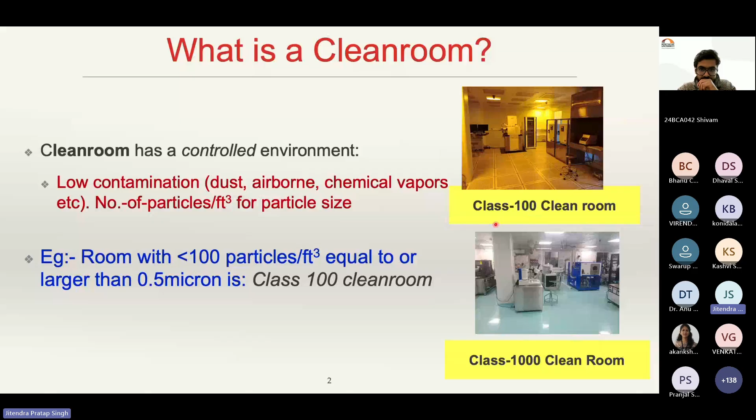So in this slide, I'm showing the classification of the clean room. The different classes are defined from class 1 to 10,000 and more. In this column, the definition is such that taking 0.5 micron size bigger particles, if they are less than 100 particles, we say it's a class 100. There is an ISO standard also—sometimes people say it is ISO 5 or ISO 6. So this is the classification of the clean room.

Now, what facilities normally in the clean room we can see, where we talk about semiconductor device fabrication. One facility is electron beam lithography, where you can use this lithography for devices which are up to 10 nanometer or of the order of 10 nanometer or so.

Or there are other devices like PECVD, plasma enhanced CVD, or reactive ion etching—these are technologies—or E-beam evaporator for metallization, or sputtering, also for contact deposition. There are mask aligners, and other facilities like oxidation furnace for making a uniform oxide layer with controlled thickness, atomic layer deposition, or thermal evaporator. Atomic layer deposition means sometimes we need a very thin layer, like a monolayer deposition, so then we talk about atomic layer deposition.

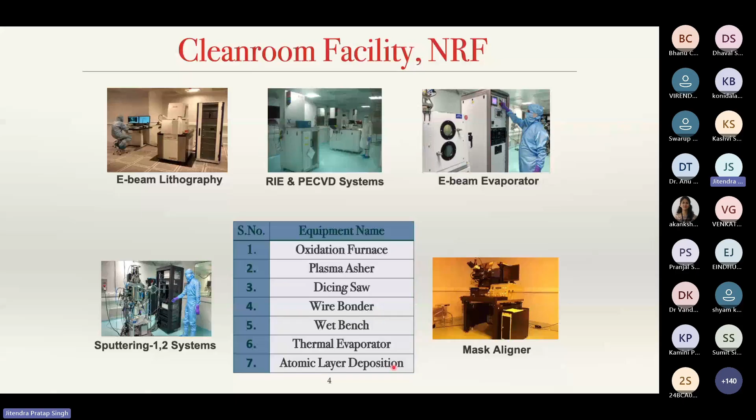Now, first of all, let's talk about in the clean room what are the sources of contaminants. There are many sources of contaminants, mainly three. First is molecular contaminants. This means contamination can come from outgassing—if there is some paint, or some chemicals, there might be vapors coming out.

Or materials can have gases coming out—desorption of gases from the material—and those gases can be a contaminant for the clean room where you fabricate your device. Or there might be oil vapors if you are using various pumps, like rotary, diaphragm rotary pumps—those oil vapors can also be a source of contamination.

When we talk about it, we only allow less than 100 particles per cubic feet—it's a very small number. So this small amount of contamination can also basically disturb the devices.

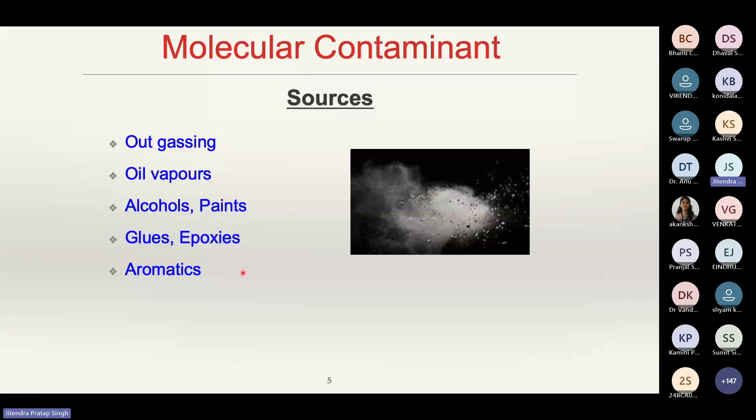There are also glues, epoxies which are used, and aromatic compounds—many sources of contaminants which are molecular in nature. There might also be surface contamination, like here at a workstation or workbench inside a glove box where you fabricate the device in a controlled environment, but the workbench itself can get contaminated.

One of the major contaminations is basically fingerprints, because our hands have oil secretion—oil and grease that comes out from the body, and that is very sticky. Once it is there, it's very difficult to remove because it is a source of molecular contamination. Skin oil, hand cream, face cream, polish—all of these can be sources of contamination inside the clean room.

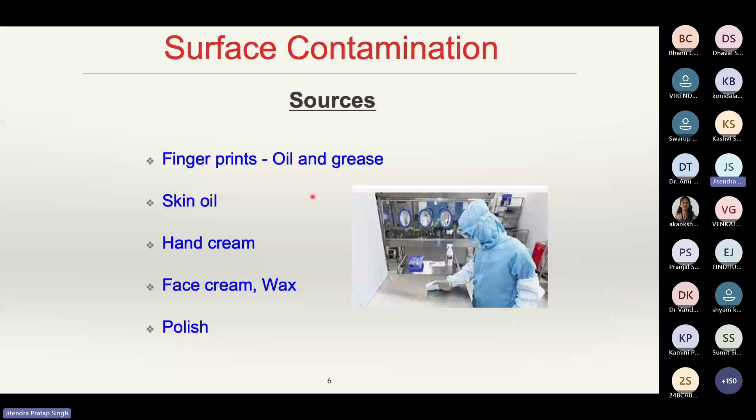The other source of contaminants, which is basically the most important contaminant, is the person himself—the people who are actually working inside the clean room.

So you see we also shed a lot of particles. We don't care in a normal environment, but when you're talking about class 100 or class 10 environments, where we can only allow less than 10 particles per cubic feet, or less than 100 particles per cubic feet, this is very important because there are a lot of contaminants from the person itself, like skin, hair, clothing, lint. Those are also kinds of contaminants. There are also some particle-shedding materials, like cardboard boxes and paper.

Even when we use normal paper, it can also be a source of contamination. So inside the clean room, we take care of all these things, even paper, pens, whatever we bring in. They are different, not the regular conventional things we can bring inside the clean room, because that can also be a source of contaminants. They can shed particulates into the air.

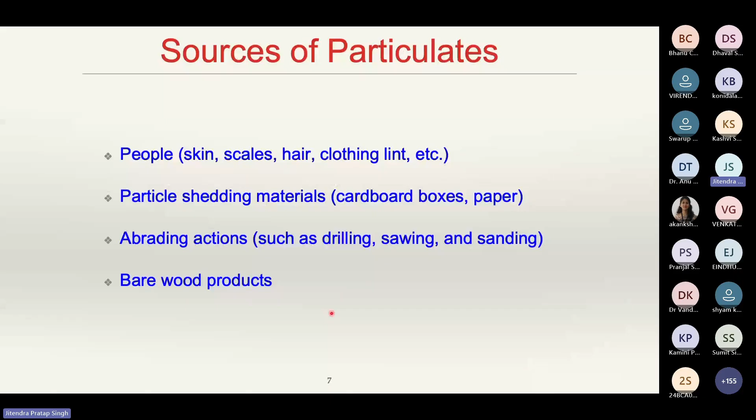And there might be some abrading action. Normally we avoid things like drilling, sanding, sawing, or bare wood products. So normally we use all-metal systems inside the clean room, because bare wood products can also be a source of contaminants. They can also release contaminating particulates into the air.

Now let me talk about what it means by particles more than 0.5 micron, since that was in the definition. You can see here, the black circle represents human hair. You can see the size of human hair.

The human hair size is about 100 microns, and this small red dot is on the same scale, about 0.5 micron thickness. Normally anything more than 50 micron is visible to the eye, and this 0.5 micron size is much smaller than that — more than 100 times smaller. So these particulates are very small; they cannot be seen by the naked eye.

So that's why it's very difficult to control those things. Most of these particles are too small, and mostly they bond with surfaces through electrostatic bonding. They get charged, and because of dipole interaction, they get attached to surfaces. So this is something like the size I'm talking about when I say particles more than 0.5 microns — what does that mean if we compare it with human hair?

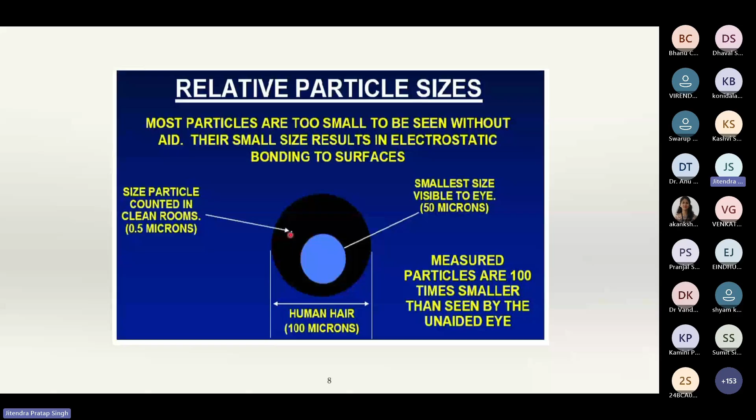So when we talk about particles, we only allow less than 100 particles more than 0.5 micron in size. This picture gives you a relative idea of the size we're talking about. When we talk about 0.5 micron or less, we cannot see it with a normal optical microscope — it has to be through a scanning electron microscope or other microscopy techniques to even see those things.

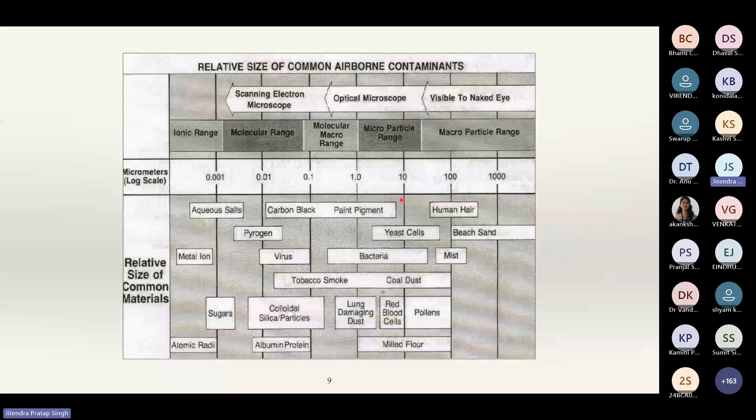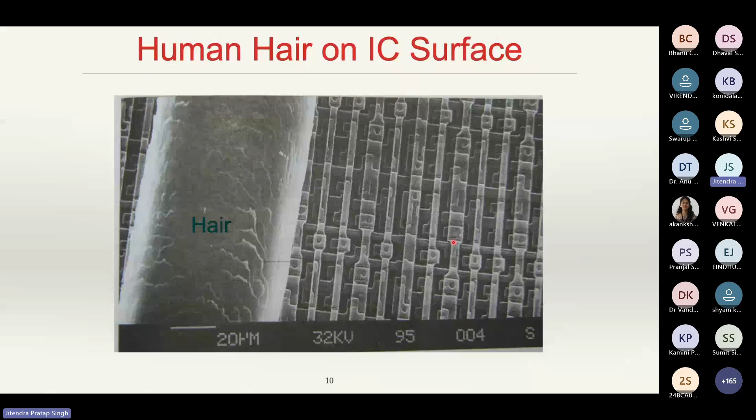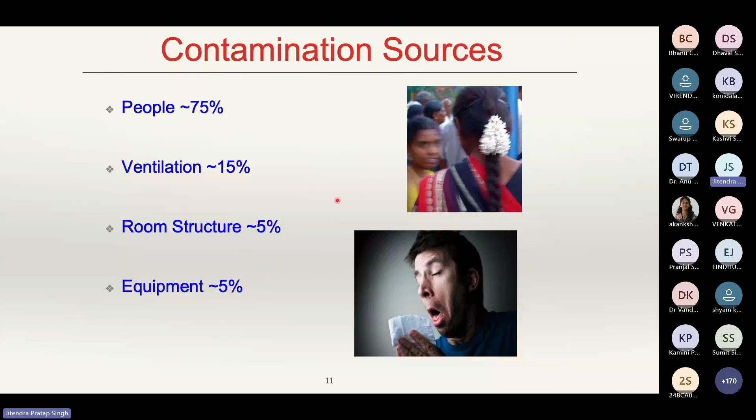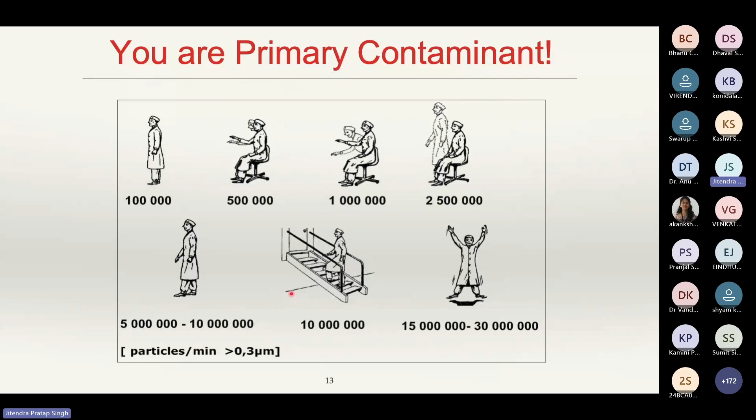So when you go inside the clean room, you have to properly dress up, as you can see people dressed up inside. We also limit the time spent inside the clean room, only going in when needed. That's why every clean room has an entry and exit log, and we also monitor people's activity inside.

So that gives you an idea about the clean room, what it means, and what type of activities one can normally do inside it. Let me give you one more idea.

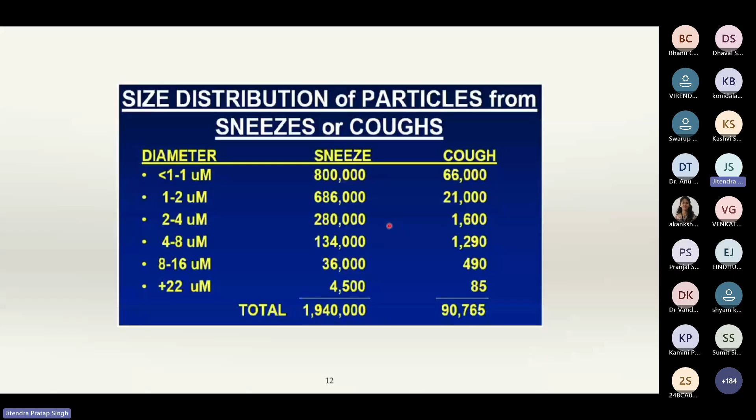One time sneezing gives about 800,000 particles coming out, compared to coughing which gives about 66,000. That's why we use a double layer mask inside the clean room, because the number of particles coming out from sneezing or coughing is very high. So this gives you an idea that when working inside the clean room, it's important to wear all the suits properly and in the correct manner, so that you really cover all of your body parts while going inside.

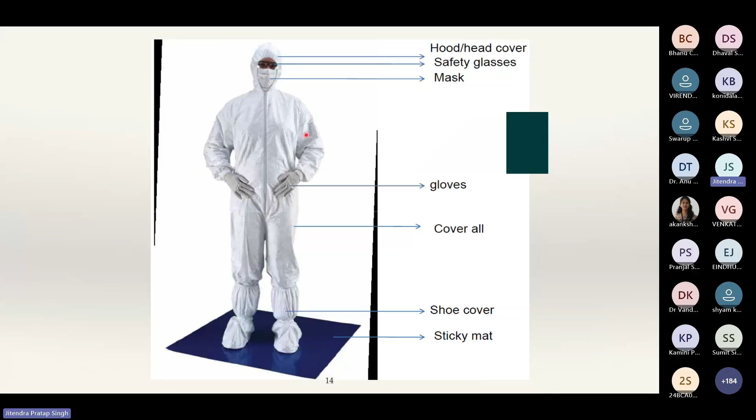Now I'll talk about the facilities inside the clean room. Here I'll discuss some lithography techniques we use inside the clean room. Nowadays we fabricate nanostructures like transistors or nano devices inside the clean room. For lithography, there are two approaches to form nano devices: one is the top-down approach, and the other is the bottom-up approach.

Top-down approach means basically we just use the lithography method. We just use the patterning and then make the devices there.

Bottom-up approach means it uses techniques like CVD, plasma enhanced CVD, or physical vapor deposition. These kinds of methods we use for the bottom-up approach.

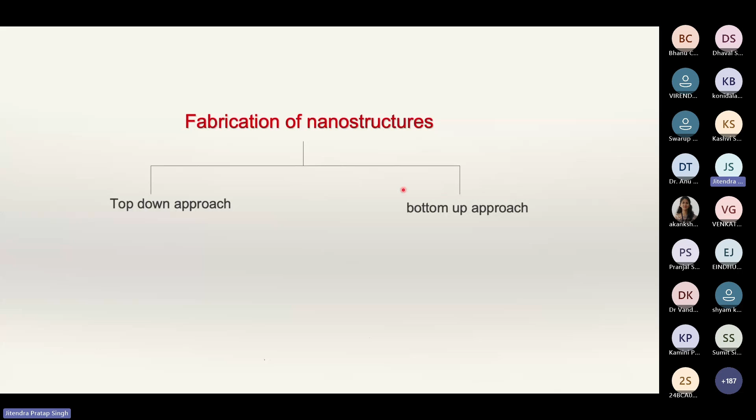So the lithography process is basically your top-down approach. What happens inside the lithography process? We create the nano devices by making some pattern on the substrate. How do we make the pattern? These patterns were made by creation of some kind of resist on the substrate.

I'll show you in the next slide. So we use a substrate here, then we just coat the substrate with a resist. I'll talk about what the resist is after this slide. And then we put a mask here.

Mask is a physical mask, sometimes fabricated by other techniques, like this can be a steel mask, and then this whole structure is basically irradiated.

This irradiation is done by different kinds of methods. One can use basically the visible light, ultraviolet, X-ray, electron, or ion. These are the radiation sources which are actually impingent on the photoresist material.

This photoresist material is nothing but some kind of polymer, or sometimes it is a metal oxide. This polymer's property is such that when it undergoes some kind of irradiation, it is actually chemically changed.

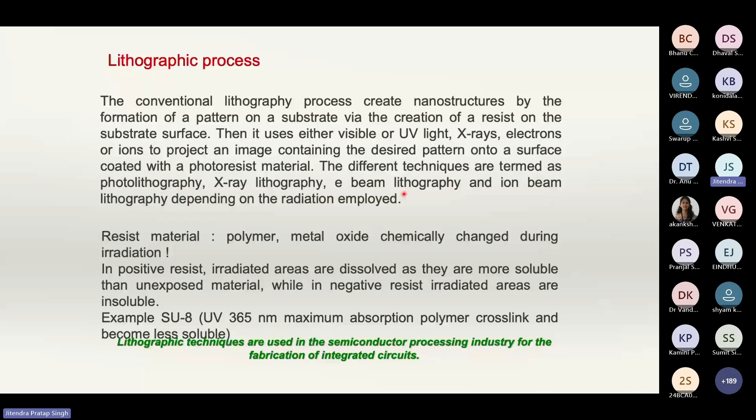Now there are other techniques. This is the general idea about lithography. Then there's another technique, past like two decades or more, which is actually in the market, which we call nano imprint technology. Nano imprint technology is basically where we don't use any kind of photoresist with irradiation, it's a kind of stamp or mold we use, and then you directly put it on the substrate and press it, like in this way.

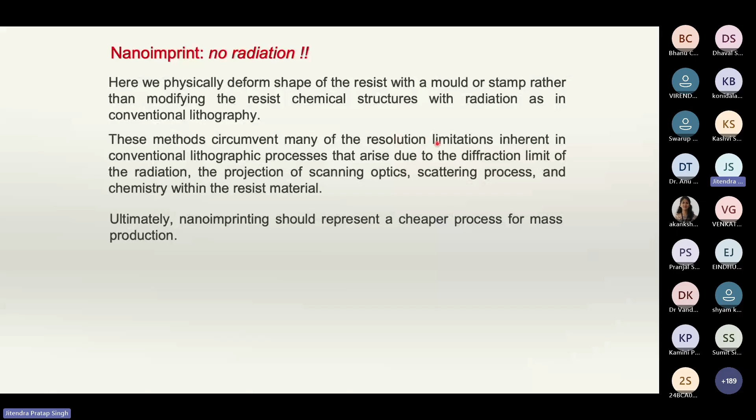So you have a mold here, we have a resist here. Without using any kind of irradiation, whatever is the mold, you can get a negative imprint on the resist just by pressing the mold against the substrate where we have the resist. So you can get a pattern here.

But this technique looks very simple, but it is mainly for polymer kind of structures. If you want to fabricate those, these are more useful. But for devices you want to fabricate on silicon, it's not that much useful for the semiconductor material.

But there's another technique also, like we have in our lab, maskless photolithography. Maskless means we don't use any kind of mask here, because remember when we talk about the lithography process, I told you we first coat with resist and then put some physical mask here. This is a very big limitation, because depending on the shape of the mask, you only get the pattern on the substrate.

So if you have a square mask, or a triangular mask, or circular mask, and if I want to change the size of the window, then we have to fabricate those kinds of hard masks, like steel hard masks, with different techniques, which is very tricky. So one technique which allows where we don't use the physical mask, which is direct lithography, is the maskless lithography.

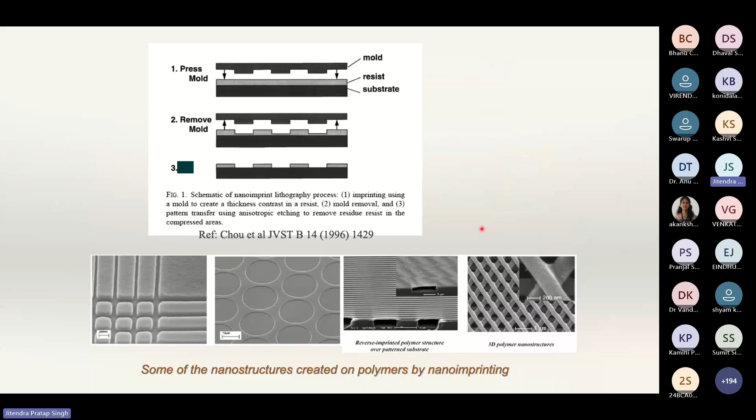There are many tiny mirror systems, which either allow the laser to fall on the substrate, or there are mirrors which can take away light from the resist itself. So we just control the light on and off over the surface, over the resist surface. Instead of a mask, we physically use the mirror system in the machine, such that the light will fall on the surface, or it won't fall on the surface.

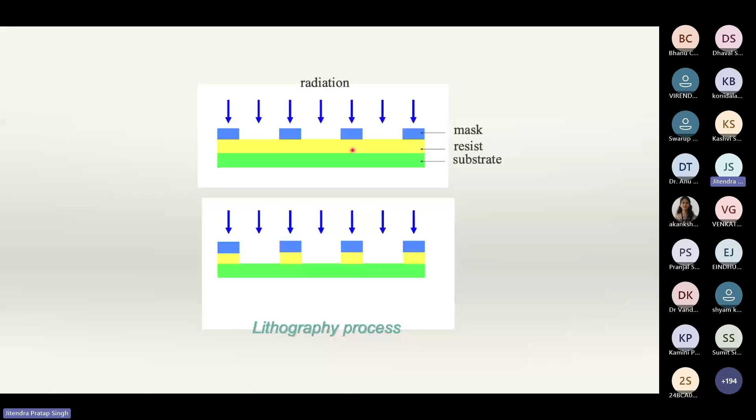So this we control very accurately by using some kind of digital mask, which controls the position of the laser falling on the resist. So it's very accurate positioning, and by that we can fabricate the pattern by the maskless method.

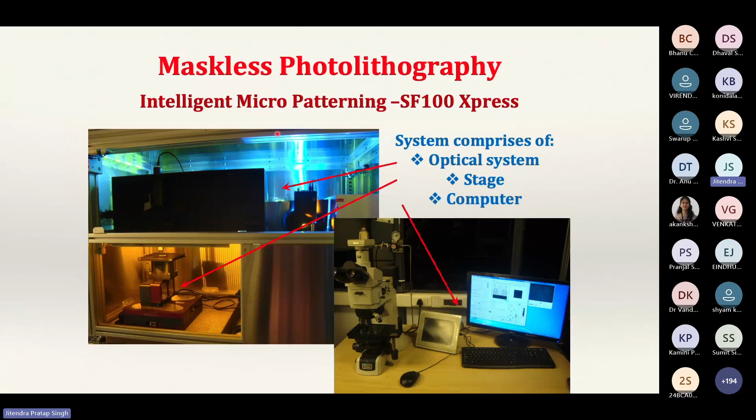And like I showed you, SU8, I talked about that. There's an SU8 series, and you can use either positive photoresist or negative photoresist. So then we don't need any hard mask for patterning.

This is one of the very big advantages here, because fabricating the mask for the pattern is one of the big challenges, because every time you want to change the pattern, you have to change the hard mask itself. And it can go to the full large wafer, like in one go you can fabricate the device pattern over the 6-inch wafer in one go also.

So this technique is well suited for wafer scale fabrication too. Now there's also lithography, which we talked about.

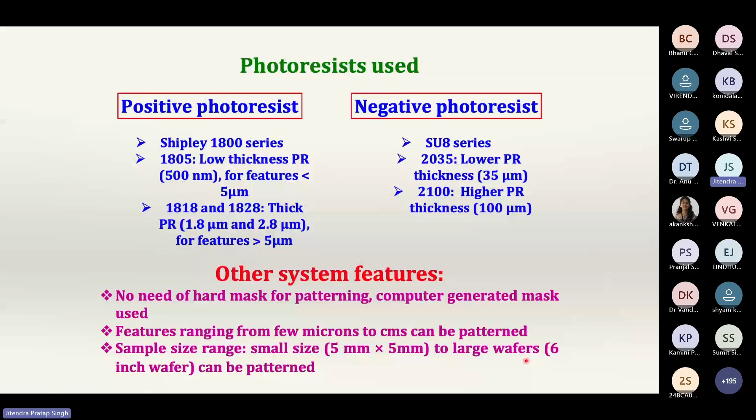That's the technique where we use the top-down approach, starting from the photoresist, and then we fabricate the pattern using different kinds of lithography. You can choose the lithography depending on the resolution you want. If we want nanometer-level resolution, we can use electron beam lithography. If our pattern size is up to a few microns, we can go for photolithography, or we can use ultraviolet UV lithography. So that was the top-down approach.

Then there's the bottom-up approach, which means we fabricate the pattern or structure from atom to atom, attaching one atom to another, and building up the device or pattern that way. That's the idea behind the bottom-up approach.

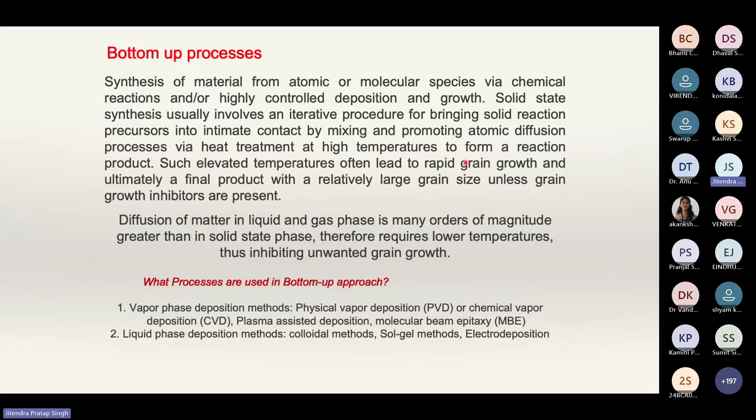One technique we use here is physical vapor deposition. In physical vapor deposition, we convert the solid material into the gaseous phase using some physical process. This can be done either by sublimating the material using electron beam heating, or by using laser ablation, where we shine a laser on the material and it sublimates into the gaseous state.

Or we can use some kind of sputtering, where energized ions get bombarded onto the target material, removing material from the target, which then gets deposited onto the substrate. There are different methods under the class of physical vapor deposition, but in all of them, the deposition happens atom by atom.

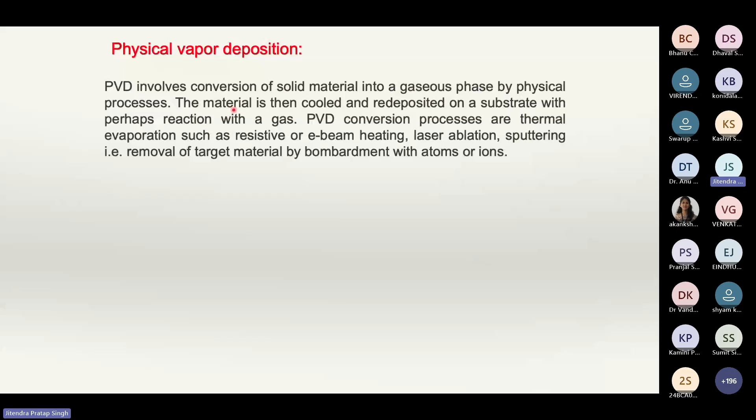One example I'll give you, which we normally use for coating or contact fabrication, is the magnetron sputtering process. In magnetron sputtering, you use the substrate as one electrode, and the other electrode is your target. The target is the material you want to deposit. Suppose I want to deposit chromium, gold, or platinum — that will be my target material, say a platinum target.

Then we create a vacuum in between, and we introduce a carrier gas, which we use to create a plasma. Typically we use argon, because argon is inert, so it doesn't react chemically with the target material or leave any chemical residue on the substrate. That's one of its advantages.

Then we apply a high voltage between the anode and the cathode — the anode is the substrate, and the cathode is the target material. We apply a very high voltage between them, and then, at a certain voltage, by optimizing the pressure inside the argon gas...

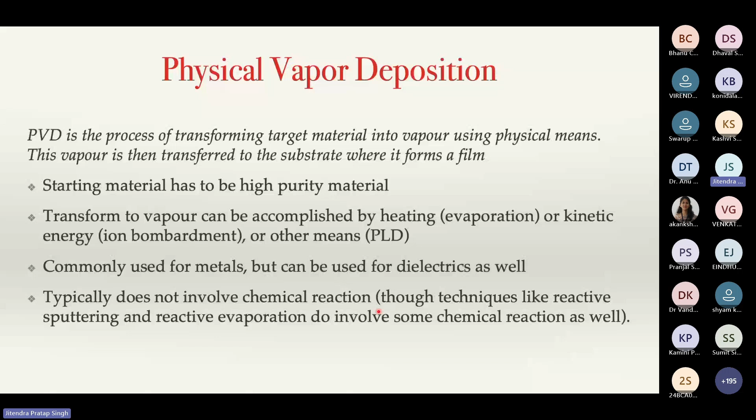But if you go by the sputtering system, because ions are hitting from all places and coming towards the substrate from all directions, they deposit very well. So sputtering is a very useful technique. You get a continuous film on the side wall also. That is one of the advantages here.

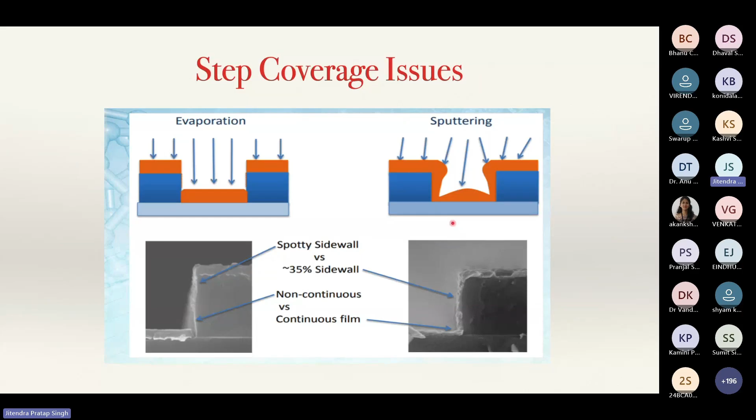Now we talk about a little more physics about how the deposition happens. One can think, can we deposit the film in atmospheric condition, or do we need vacuum? Let's see the reason why we cannot do this kind of deposition in atmospheric condition.

There's a term, mean free path. Mean free path means, between any two successive collisions, what is the length traveled by the molecule. If I talk about air, we mainly have nitrogen, and the gas molecules are moving, so between any two successive collisions, what is the length? If I talk about atmospheric pressure, which is 760 torr, the mean free path is of the order of 40 nanometers. It's a very, very small size, even less than that actually.

So when we have the substrate and the target, this distance is normally a few centimeters, a few tens of centimeters, around 20 centimeters or more than 10 centimeters.

So in this case the mean free path is 40 nanometers. This means you won't get meaningful deposition when you are working at atmospheric pressure. If I reduce the pressure and go for low vacuum, around 0.76 torr, the pressure and mean free path are inversely proportional, so when you go for lower pressure, the mean free path actually increases.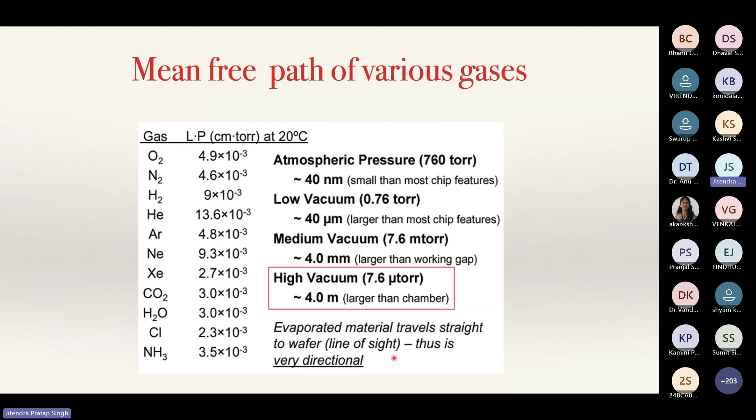Now I'll talk about contamination also. The other reason why we use deposition inside a vacuum chamber is we want very good vacuum. High vacuum is good enough, but normally we go for ultra high vacuum also, like 10 raised to power minus 9 torr. High vacuum is 10 raised to power minus 6, and if you go up to the limit of 10 to power minus 9 or better, we call it ultra high vacuum.

So what happens is, if you have a surface, in air there is always some humidity, and water molecules are present. These water molecules are polar molecules - water has a very high dielectric constant. Because of this polar nature, these water molecules or other contaminants get dipole interaction with surfaces. Even if the surface is not charged, there might be some dipole interaction.

Because of that, most surfaces will always be covered by a very thin layer of water, which we call humidity - there will be some water patches on your surfaces, or contaminants, vapor species, dust, or other gases which you don't want. Oxygen is one such gas - most surfaces get oxidized because oxygen molecules randomly land on the surface. They can react with silicon to form silicon dioxide, or with other materials to cause oxidation, whatever contact you are making can also get oxidized.

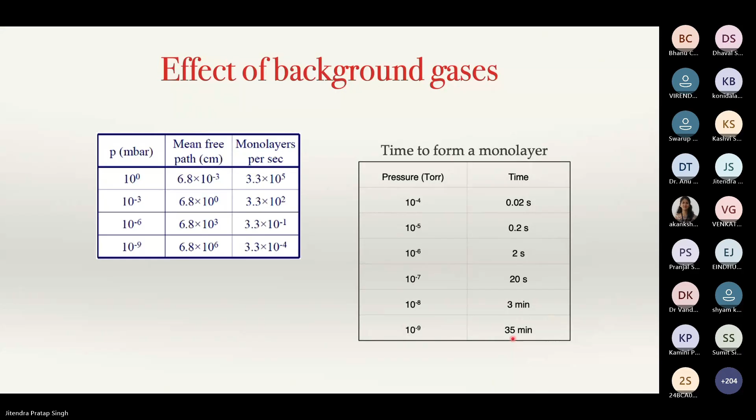Now the other important case: mean free path and pressure are very important parameters when we want to fabricate a device or contacts. The other thing is the arrival ratio. In case of deposition, arrival ratio means how many molecules arrive at a 1 nanometer per second deposition rate relative to the molecular impact of residual gases.

Even if my pressure is 10 raised to power minus 6 torr, whether high vacuum or low vacuum, it doesn't mean there's no other gas. It's still vacuum, but it's still 10 raised to power minus 6. In layman's language, at atmospheric condition, 760 torr or about 1 atmosphere, there are about 10 raised to power 19 molecules per centimeter cube. So this is the molecular number, 10 raised to power 19 molecules.

If you reduce to 10 raised to power minus 6 torr, there are still a huge number of molecules per centimeter cube. The mean free path is big, but there are still chances that the vapor species get hit by residual gas molecules still inside the chamber. So we define some kind of arrival ratio here.

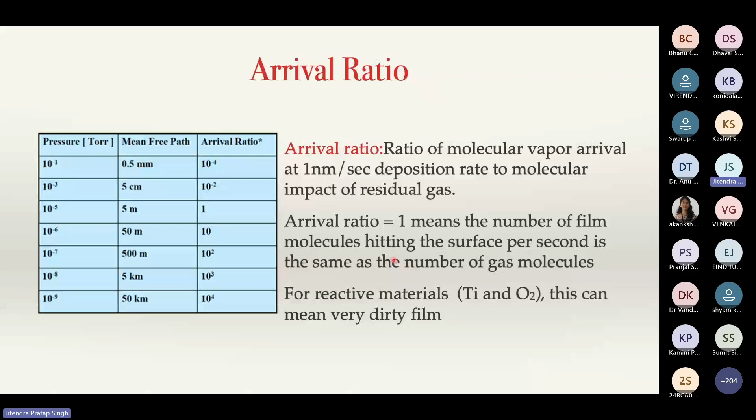Now the other thing is vapor pressure. Suppose we want to deposit some material, and it's changing its state from solid to gas phase if sublimating, or from solid to liquid and liquid to vapor if melting. The vapor pressure is very important, because it will ultimately define how much the deposition rate is.

Normally the vapor pressure depends on your operating pressure, like in a PT diagram. For a given PT diagram, your triple point is fixed. If I reduce my operating pressure, the surface evaporation will take place much more easily. So in the PT diagram, I can change the operating pressure, and that can change my triple point.

You can easily increase the vapor pressure, and easily go from the melt state or solid state to the vapor phase. This can be done by using the Clausius-Clapeyron equation. I'm not going into much detail, but that is the idea.

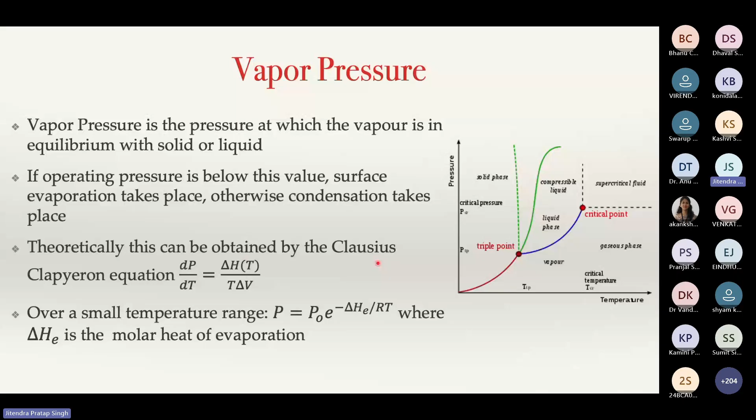This graph shows vapor pressure versus temperature. Vapor pressure is also a function of temperature, so depending on different temperatures, different materials have different vapor pressure. If I want to deposit aluminum, I want to increase its vapor pressure, so this graph gives you the idea of what temperature corresponds to what vapor pressure.

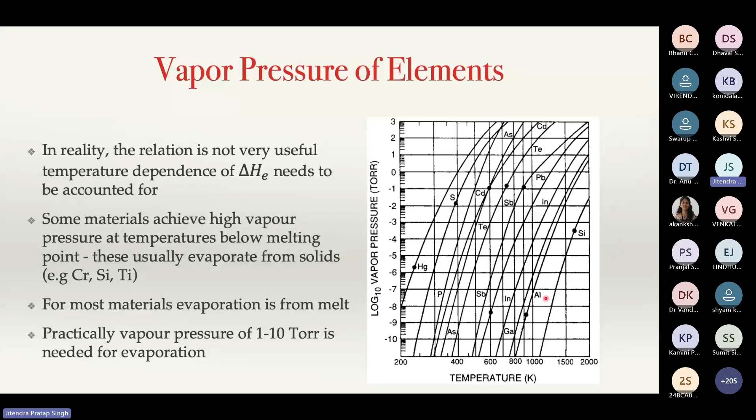So normally we have this kind of experimental graph with us. Then we can use a Knudsen model for evaporation to calculate the mass evaporation rate. This is a function of temperature, a function of the molecular weight of the species, and also the vapor pressure. It's a function of the vapor pressure of the liquid or melt, and you have to subtract the partial pressure of the vapor in the gas. So it's proportional to the vapor pressure of the liquid - more the vapor pressure, the higher the deposition rate.

So we have this kind of model, and for different materials, knowing the vapor pressure-temperature dependence, you can put the vapor pressure value in and obtain - as in this example for aluminum - what the mass evaporation rate is.

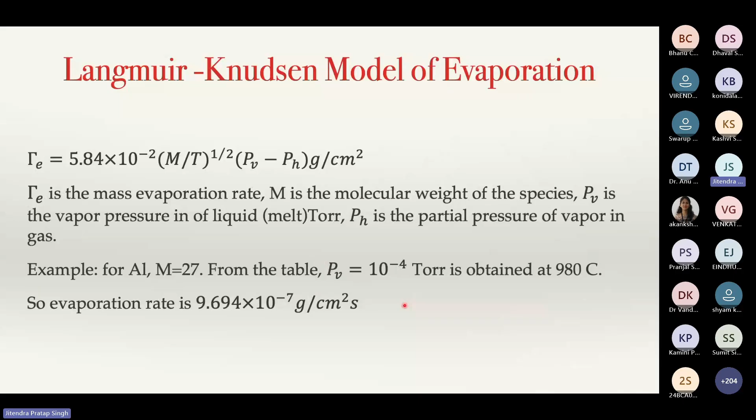Now regarding the deposition rate, there can be two types of sources: a point source or a surface source. Point source means the vapor flux can go in all directions isotropically - like a point source where vapor flux comes out equally in all directions.

We can calculate this by applying a little theory. You can define the area vector, then calculate how much vapor flux is going from there, and calculate the deposition rate - how much deposition rate there is - suppose you have a substrate here.

Now if I have a surface source instead of a point source, you don't have isotropic deposition. The deposition follows a cos theta cos phi kind of function. So there are two types of sources, and depending on the type of source, the deposition rate can be calculated very easily - theoretically we can get some idea of how much the deposition rate is.

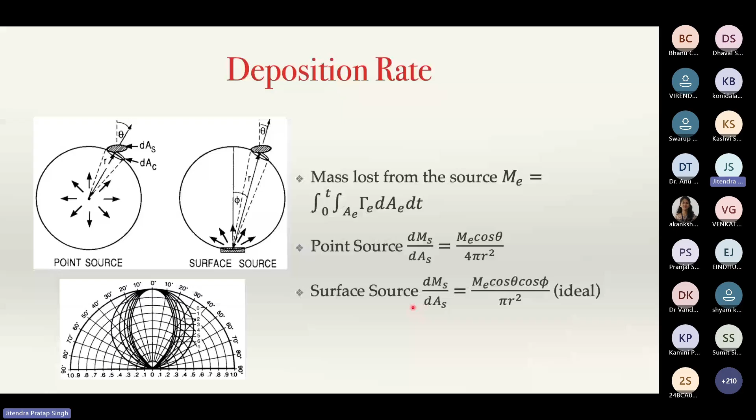Thermal evaporation is a very simple technique where you use a crucible or boat - a high resistive material with a very, very high melting temperature. We pass current through the boat, and since the resistance is very high, it gets heated because of I-squared-R, so the boat gets heated up to a very high temperature.

You can heat up to 1200 to 1300 degrees centigrade, and then we put our material which we want to deposit. This particular boat is made of some special material, so if you want gold, you put the gold wire or gold pellet inside, so that when you heat it, the gold actually gets melted out, and from the gold melt we create gold vapors inside the chamber, which then get deposited there.

One of the properties of the boat material is that it should not interact with your evaporant material. That's why we mostly use boat material which is refractory material, not making any reaction with the gold, like tantalum. We can use tantalum, tungsten - these are the materials normally used, and sometimes graphite boats also people are using.

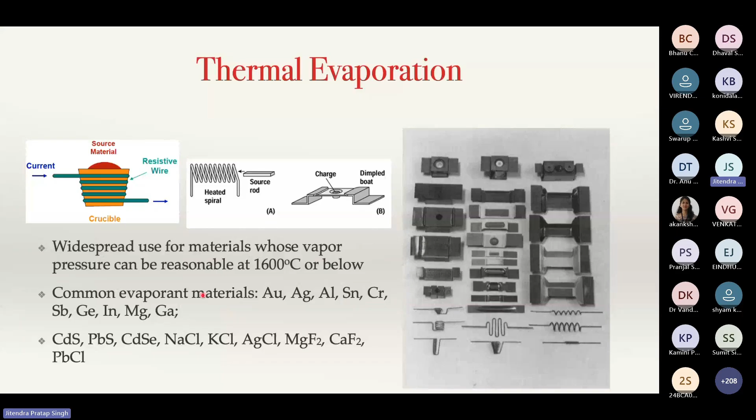The common evaporant materials which we use for thermal evaporation are gold, silver, aluminum, tin, chromium. We normally use these. Let me show you the picture here.

This is one of the evaporators which we have in our clean room. You can see here that these are multiple crucibles. There is a window here, and a shutter which you can put there when you don't want the material to get deposited.

This is my substrate here, which is cooled by water, and there is a thin film measurement setup which we call quartz crystal, by which we measure the thickness of the film also. So what happens is you heat this material inside, it gets evaporated and deposited on the material. When you check the thickness and get the right thickness, you put the shutter and turn off the evaporator.

Now one problem - if I take the case of E-beam instead, I'm not showing the picture, but in E-beam you have a crucible and the electron beam is hitting the surface, not like this whole geometry getting heated up. So the boat is heating up, your material is also getting melted because of that. In E-beam, because the electron beam is very dense, you can shine it and localize it on the surface, so you get localized heating. Your chamber or other material doesn't get heated up, so the contamination issue is less in electron beam deposition.

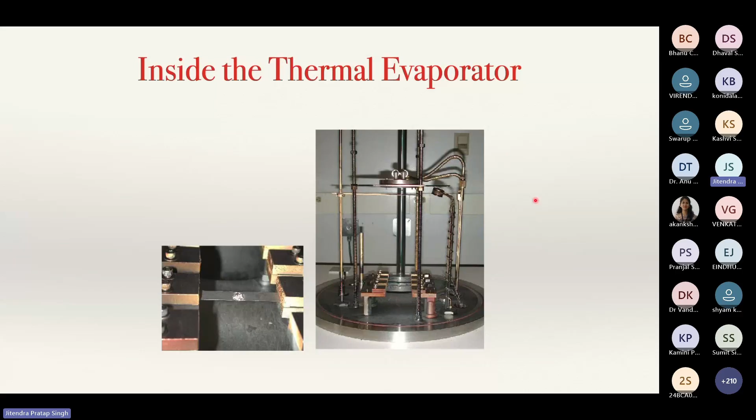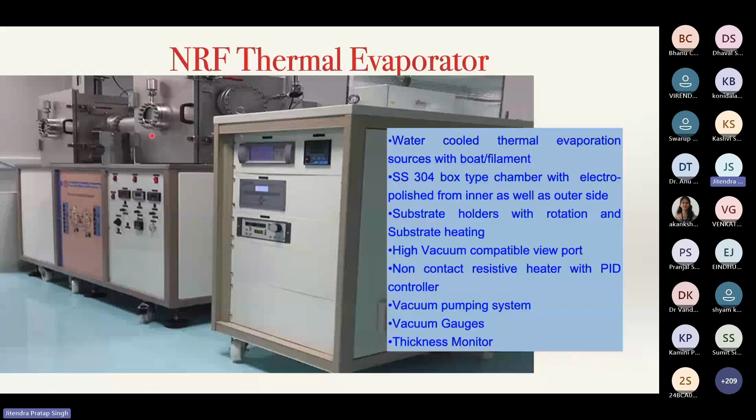So I just end here, and really thanks for your attention. I'll be happy to answer queries if there are any. Yes, thank you.

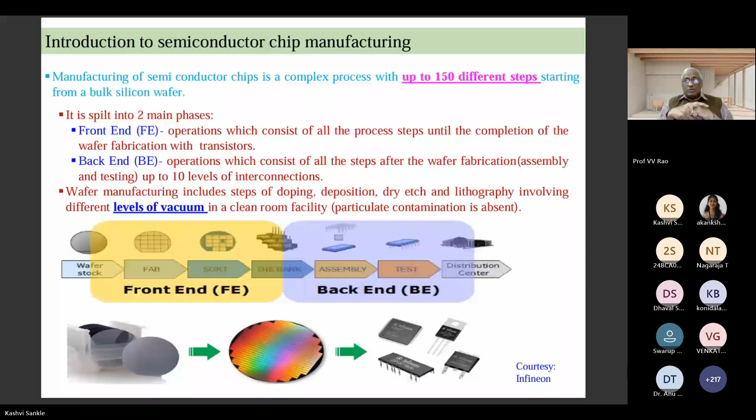And of course, you will have different levels of vacuum for different processes. But what are these various processes I have listed here? If I want to talk about it, each paragraph will take 2 hours, because we teach this subject over a period of 6 months to our BTech and MTech boys in semiconductor manufacturing. So I cannot cover a particular background aspect of vacuum technology in 1.5 hours unless I skip some of these materials research oriented things.

But still, I want to touch upon some of the processes so that you get used to it. This is an interrelated subject. Basically processes like physical vapor deposition, chemical vapor deposition, low pressure plasma deposition, or atomic layer deposition all require high vacuum chambers in which clean, controlled things are going on.

In the earlier talk they introduced the mean free path concept, so I don't have to talk more about it. As you increase the vacuum levels, the distance between two collisions of the ambient molecules keeps increasing. By the time we reach 10 to the power of minus 6 torr, which is nothing compared to the ultra high vacuum required for semiconductor manufacturing, the mean free path is already kilometers, hundreds of meters.

The actual gap between the substrate, our semiconducting thin wafer, and the bottom material, the evaporating semiconducting material, is only 30-40 centimeters in our 1 meter. So naturally, no other interaction takes place except what we want, such as depositing silicon or silicon dioxide or etching. Only those molecules can travel in a straight line path without hitting each other, because the mean free path has been made artificially much longer. So most of them will travel from the source, whether it's thermal evaporation or sputtering.

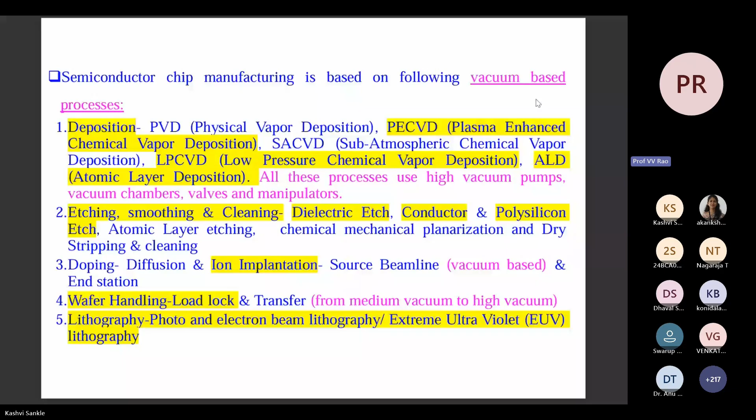The cleanliness can be obtained in a clean room, even at atmospheric pressure, with a lot of money. Or if you put in a vacuum, without much money, you can get the same cleanliness. But you have to use both, because without a clean room, people will not be there to operate, unless there are robots. You cannot make a vacuum room and vacuum chambers and vacuum depositions otherwise. But maybe in the future, after 30, 40 years, there can be vacuum robots. Then you don't require anything, and the requirement of clean room may also go down.

So we'll have to see how the world is going on. Ultra pure gases for deposition, doping, purging, they all have to be done under leak-tight piping everywhere, because if there are leaks, what is a dopant impurity becomes an impurity on metallization. When you are metallizing, making the contacts, that is also a thin film, nanoscale, but that is supposed to be copper or silver. But when you are doping, it is phosphorus or boron.

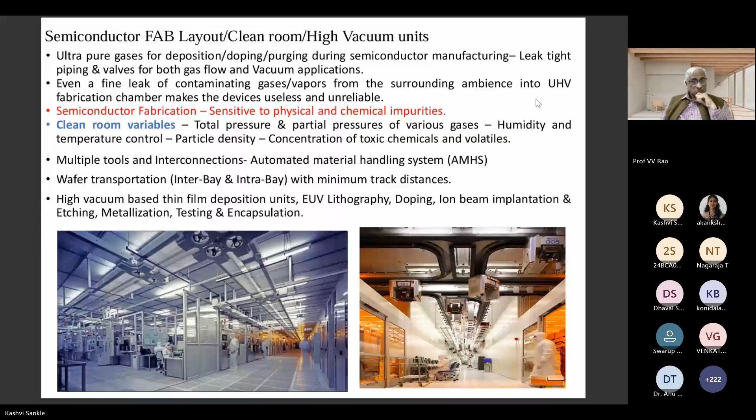This is exactly what others are going to talk about in detail, but I just want you to understand that the central portion, which is very important and repeats, is called lithography with masking etc. There are several other processes linked to this, whether it's implantation or chemical mechanical planarization to smoothen the surface of a deposited layer, or fresh layers of chemical vapor deposition depending on P-type or N-type impurities you are depositing, or metallization like physical vapor deposition of metal films, or etching, so that after lithography you etch and only certain locations get deposited while others don't, so you get PNP transistors and resistors and attached circuits automatically made, giving you nano circuits embedded. Finally, in between, unwanted things are removed by etching, then cleaning, then diffusing the dopants and waiting until you get proper implantation of the impurities.

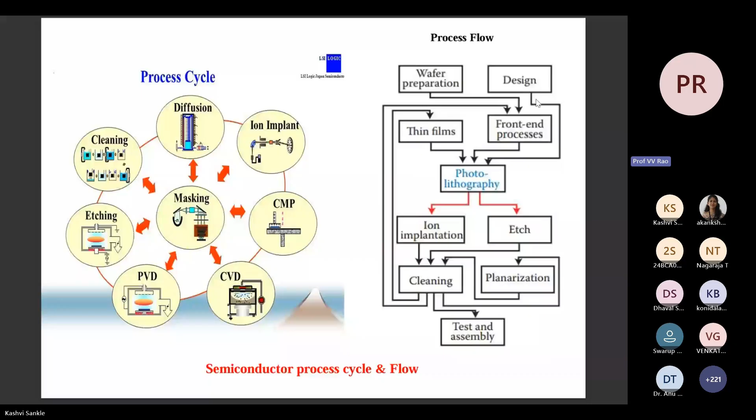So these are basically various processes, it's another way of looking at it. But why I am telling all this is under vacuum. Okay, so already time is up now. Next slide please. So let us go to what all I have been talking about. It's vacuum, what is that, first of all.

Well, according to the Vacuum Society, as I already told you, the vacuum scientific definition is: if a cubic centimeter of any space contains 2.5 into 10 to the power of 19 molecules, 1 crore times are there, and every cubic centimeter, like a die that we are playing, that much volume contains 2.5 into 10 to the power of 19 molecules. We don't see them, and the gap between them is in microns.

And when you want to go to ultra high vacuum, even at 10 power minus 9 torr, you still have millions of molecules. Because from crores and crores, you go to millions and millions, lakhs and lakhs. That's all, it's not that vacuum means perfectly atom free, it's not like that. So vacuum is defined as any given space having a molecular density less than 2.5 into 10 to the power of 19 molecules.

Only after vacuum technology was developed, electrons and protons were discovered, ions were manufactured, discharge tubes were made, and then only semiconductors and electronics came. Electronics, which is the dynamics of electrons, is impossible because you cannot get an electron here if all the atoms are neutral, otherwise we would get shocked.

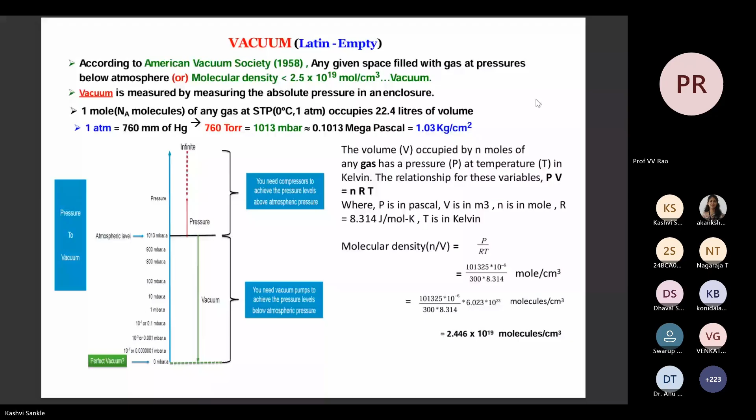There is nothing great I am showing. I am trying to help all of you recollect what you studied in 11th and 12th class. All electrical and electronics is 12th class physics, and mechanical, metallurgy and all those things are 11th class physics. Many times we reproduce the same concepts again with a bit more mathematics and finer details. This is a fact I have seen.

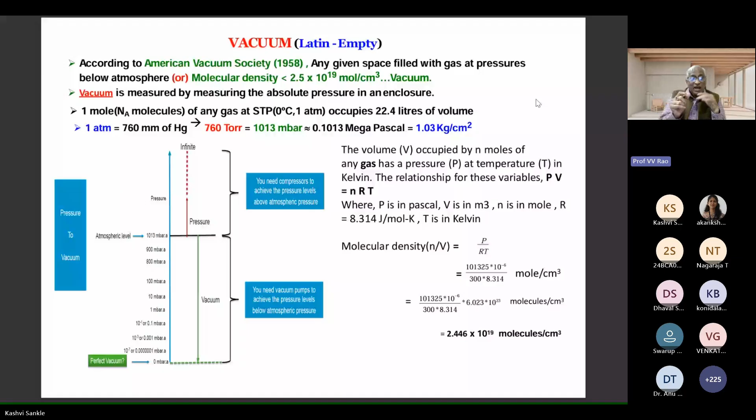So please go through your 11th and 12th class books once again to formulate proper ideas in depth. So here we have explained a few concepts: absolute pressure concept, Boyle's law, ideal gas law validity, number of molecules, 22.4 liters, STP conditions, molecular density, and units of vacuum. These are the points in this slide. Next slide please.

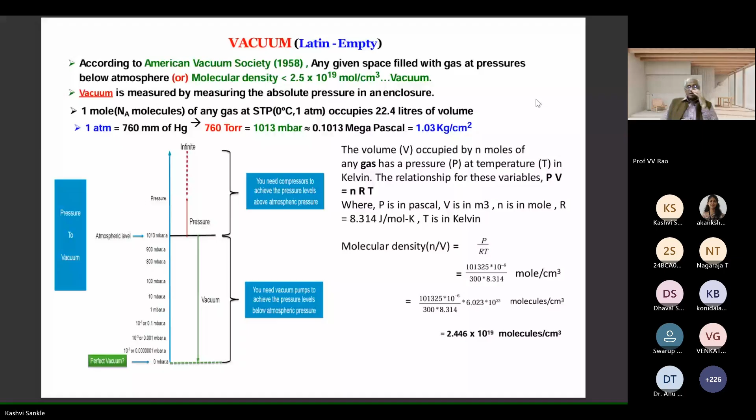This lecture is on vacuum technology, so I have to talk like that. If they had given me a topic of etching or semiconductor layer or packaging, my style would be different. But here it is mostly mechanical, so if you are mostly electronics or electrical students, you may have to understand the mechanical aspect. In fact, the real cost of the equipment is only the hardware. Once you understand all this properly, if you are able to get 10⁻⁷ controls, valves, gates, components properly, it is a child's game, that's all. You can make your own chip industry.

Now, what do you mean by understanding vacuum technology? Like any other technology, it involves production. You have to produce something, whether it is rice, vacuum, high pressure, solid or liquid, anything - that is called production engineering. Then what you produce, you must measure, so measurement is very important. Based on precision manufacturing and measurement, you design something, either a circuit in electronics or a robot or something. That is called design, based on mathematical principles, physical principles, chemicals required, materials required, and space technology.

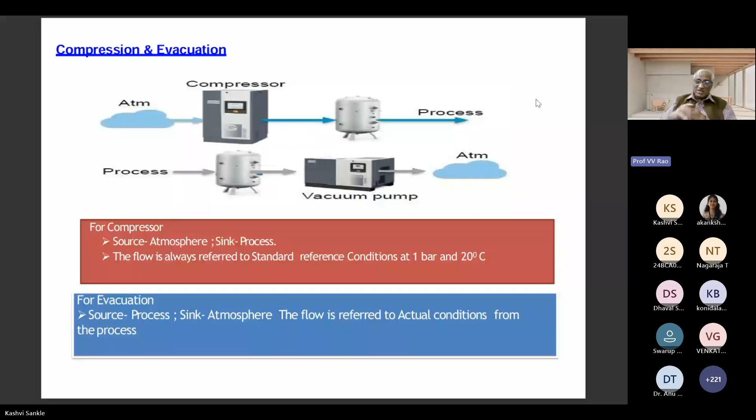So a typical system will look like this. How much time do I have? Because I am almost in the middle. Depending on that, I'll go through.

Anyway, those people who may not be directly interested in these things, they need not worry. But if you are interested in semiconductor manufacturing, which is the focal theme of this conference, you have to know the vacuum technology, because without producing vacuum, the game will not start. So it is very important, not only in understanding typical vacuum systems, you should also understand troubleshooting of those vacuum systems.

Otherwise, you will not be employed. If you only purchase and then operate, they are called operators, not engineers. Engineers should be able to repair it, design it, optimize it, minimize the cost, maximize the throughput, that means the amount of output that is coming. That's where the intelligence lies. That's where you have to use your math, physics, chemistry, material science, computer programming, and management skills.

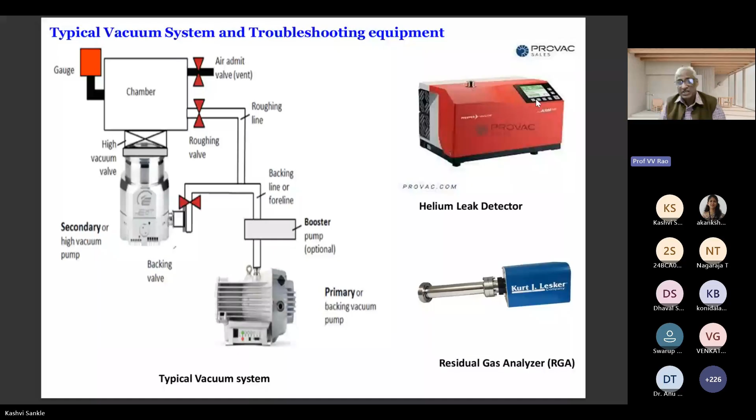So we have understood the units of vacuum. We have understood the need of vacuum for deposition, and because of long mean free path. And another thing which my predecessor has already explained, so I was lucky.

If you try to do anything at 10 power minus 2 torr, within a few milliseconds one layer is formed. An impurity foreign layer is formed before you make the one layer which is to be lithographed to make a PN junction. Already one oxide layer has been formed - that's called monolayer formation, and it takes few milliseconds. Your experimental time is few hours before you close it, package it, and put it into the chip. So during that time, the monolayer formation should take 10 hours instead - only the intentional layers, what you want to make, should be the layers. Okay, this is also important.

So the concepts called molecular density, mean free path, and time to form a monolayer - these things vary with the level of vacuum. And you can imagine, those who are interested - let's talk about mean free path.

As pressure goes down, what will happen to mean free path? Can anybody tell - will it go down or go up? There are only two options. As the pressure is going down and vacuum levels are improving, the mean free path will increase, obviously, because the number of molecules occupying the same closed chamber is less now. Most of the molecules have been removed, so they have more mean free path before colliding. Mean free path is defined not by collision with the body of the chamber - it is defined with respect to their own collisions among themselves, because the body itself is only 1 meter. What do you mean by a 20 meter mean free path? It's because normally molecules are colliding with the body much more frequently compared to colliding with each other. That's why you will have straight line paths in vacuum technology.

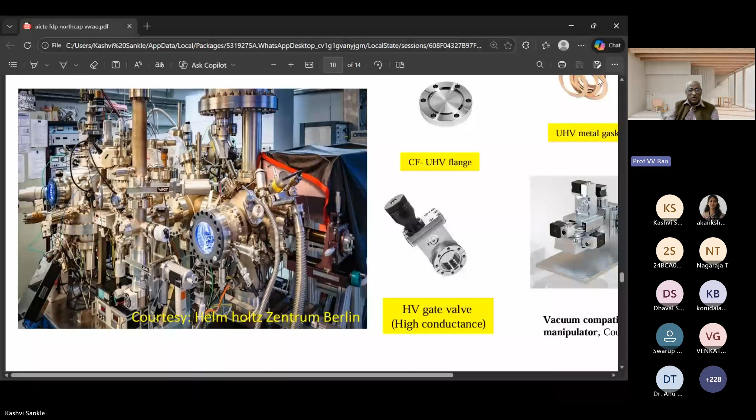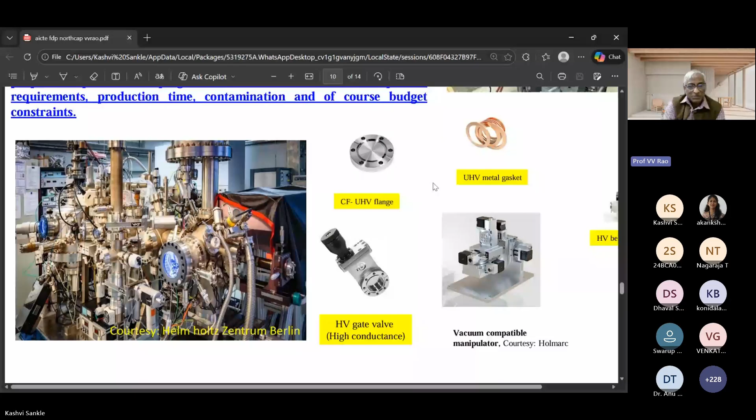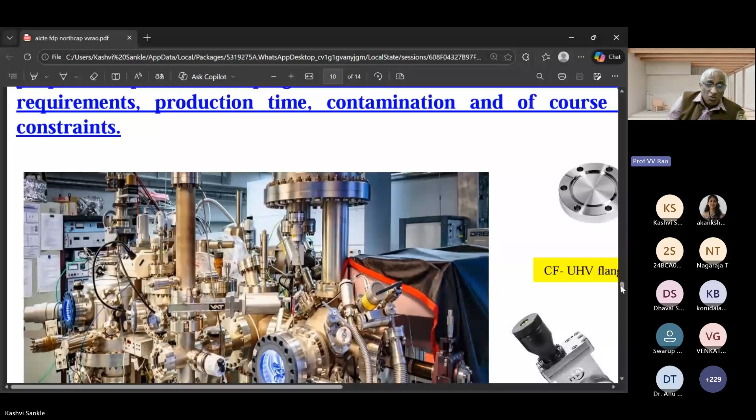All are vacuum compatible. There are couplings, valves, and I cannot explain from here everything - gauges, control systems. There are several gauges, several throttle valves, several vacuum pumps, connections and manipulators. From outside you try to do something, inside vacuum moves X, Y, Z, tilt, rotation. The wafer is finally moving. With all these complicated things, what is it we are trying to do?

We make these wafers having several dies. Each die, at a particular instant of time, whether p-type or n-type, we are depositing or etching or doping, trying to do some operations. So those valves will be opened accordingly, and those controls will be there.

And whether it is happening or not - when electron beam is there, which we will try to understand in scanning electron microscopy, high energy, reflected energy - parallelly, many people, just like when a space shuttle is launched, are instantly and continuously watching the motion X, Y, Z, tilt, rotation type. Here the observation is surface smoothness, chemistry of it, residual gases, if there is any impurity.

Immediately the process will come. There is a lot of ML involved in making the controls, logics, which make the electromagnetic controllers through electro-pneumatic controllers, finally opening the valves, gas inlets, very high purity gases after monitoring thoroughly and entering there, heating the temperatures inside the vacuum, then trying to deposit, and while depositing it is baked and a PN junction is formed. All that has to be confirmed.

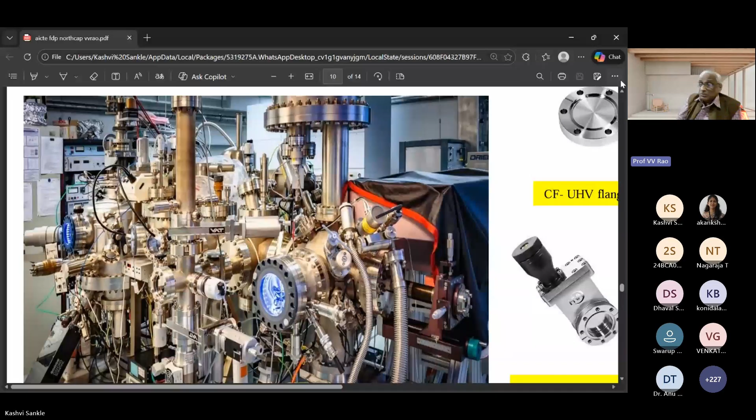You also have to notice the flanges, how many nuts and bolts are there. Unless you tighten, there are no gaskets - the gaskets are themselves metals. You have to cross the tensile strength, the ultimate tensile stress of that gasket. Then it will make almost like two flanges welded. But you are not heating and welding - you are pressing with so much pressure that at the atomic level they are diffusing, so it becomes a joint. It is not like a seal, it is a joint type thing.

So all those things you have to understand when you are talking about ultra high vacuum, which is the state of the art now. Earlier, with normal vacuum, people have done it, but today, as technology is going to micron, 10 nanometer, to 1 nanometer, how can you have a 1 nanometer structure?

Unless you make such controls of atoms. That's why for the low vacuum pumps and high vacuum pumps, process related gases, you have to check whether you need dry pumps. Sometimes normal pumps may be allowed. If it's a rough vacuum chamber, you prepare the wafer, dress it up neatly and clean, more or less free from impurities from the atmosphere it has entered.

So now from here, the next slide will go, that's where the growth happens. Then it will go to the analytical chamber. All that you'll have to understand—how do you connect them with various valves?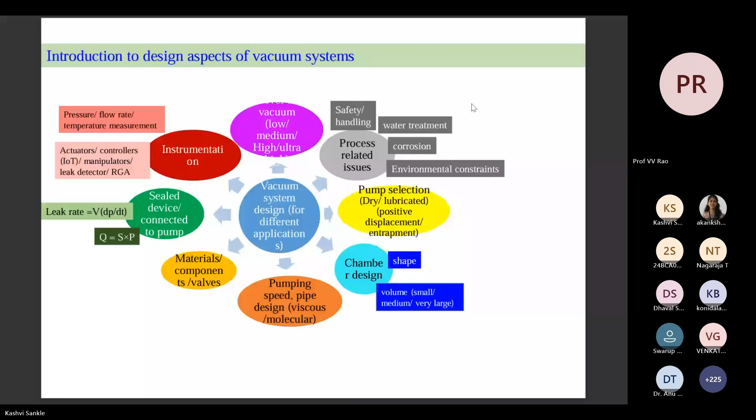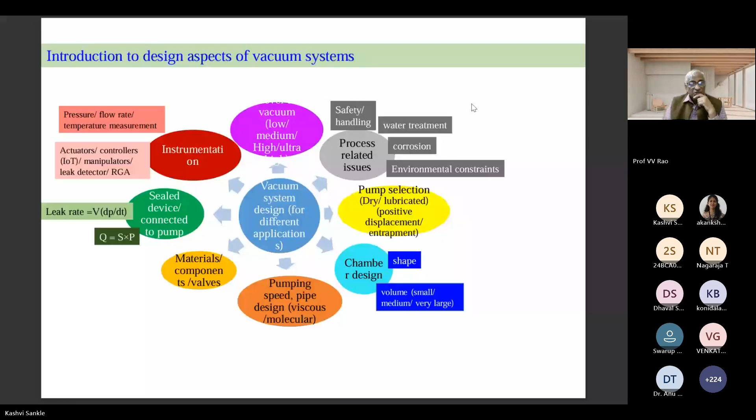Designing is important. If you make a wrong design—you have purchased a 1 crore rupee pump, 10 crore rupees of vacuum chambers, electron beam, high voltage units, and high frequency RF generators—but you are connected with a 100 rupee pipe which is badly designed, then instead of doing the experiments in one day, it will take 10 days. So production rate comes down heavily just because of a mistake in the design aspect.

So design is different, purchasing equipment is different.

So there are different vacuum chambers, walls, components, seals, flanges, pipes, all of them, manipulators for X, Y, Z, tilt and rotation through bellows—how can you manipulate inside? You can't put your hand into the vacuum chamber through the wall, but through the wall there will be some places where you'll see bellows type fittings which are sealed, but you can tilt like this. The bellows means flexible pipe, so pneumatically it is disconnected from the atmosphere but connected to the vacuum, and mechanically if you float inside it will move like this. These are called manipulators.

Very high quality XYZ tilt rotation manipulators—if you can make them with precision engineering, today it is very much possible in India. Each manipulator we are importing for more than 20 to 30 lakh rupees. It is a mechanical assembly just sitting on top of an ultra high vacuum chamber. You can make it for 2 lakhs, but it requires some knowledge. It is basically like a lathe machine, an XY machine, but we have a little more of various types of assemblies. We'll have to see that.

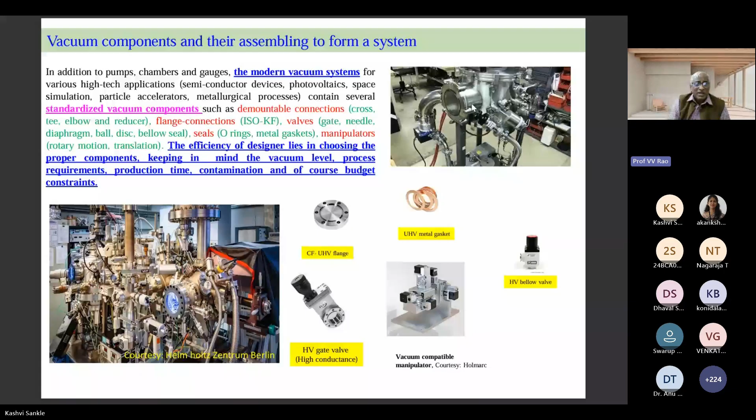At the same time, you require some flexibility. You can't just make the pump sit directly on the chamber - that's not physically possible, there will be sound, and in a clean room, the lubricating oil of the pump will spoil things. So you have to keep some minimum distance. As connecting pipe diameter increases, conductance increases, flow rate increases, and the full efficiency of the pump is felt at the chamber. Otherwise, even if you get 1 volt at the end of a wooden conductor, you'd have to put in 1000 volts, whereas with a copper wire, 1000 volts comes through directly. Something similar applies here.

So here you see there is a central chamber, and from there it is transferred everywhere - like how each morning a supervisor distributes work to laborers, telling them what to do. Similarly, when wafer is introduced, each chamber has its own turbomolecular pumps. Each is a chamber, each is one process. Nowadays they make chambers as monolithic chambers, meaning they are not welded chambers.

In welding there will be leaks and degassing, because metals degas. Rust or other impurities, under vacuum, will release into the chamber. Instead of a clean PN junction, you get a rusted PN junction, which won't behave with proper 10 to the power minus 9 second switching operation. Unless you achieve that nanosecond switching, you can't get 1 gigahertz RAM - meaning the 0 to 1 transition happens in 10 to the power minus 9 seconds, so electron mobility must be very good. That requires controlled deposition and doping, which happens only under ultra high vacuum processing.

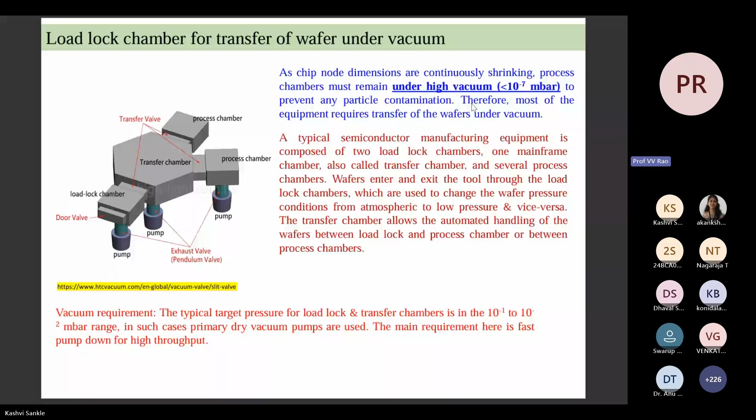So when you do chip manufacturing, you need to understand the processes first - deposition, etching, doping, lithography - and handling the wafer through all these processes one by one under vacuum conditions, sometimes under vapor conditions, but always at sub-atmospheric pressure, at different vacuum levels across different chambers. So I am showing the process cycle again here.

You have to do cleaning in vacuum chambers, diffusion in vacuum chambers, ion implantation, and chemical mechanical planarization at fairly rough vacuum. Once you deposit and etch, you make wells and deposit - what does depositing actually mean?

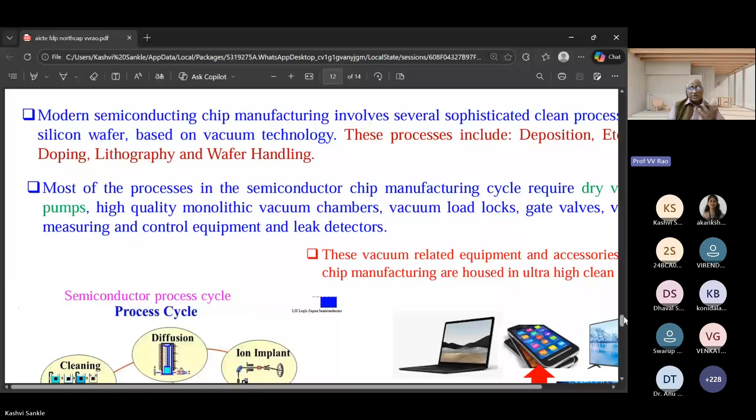So if you do all that, if you see the right side, can you magnify that right side picture please? Left side I have shown the processes which I have discussed, and all the information is basically that. So modern semiconductor manufacturing, just zoom that right side picture.

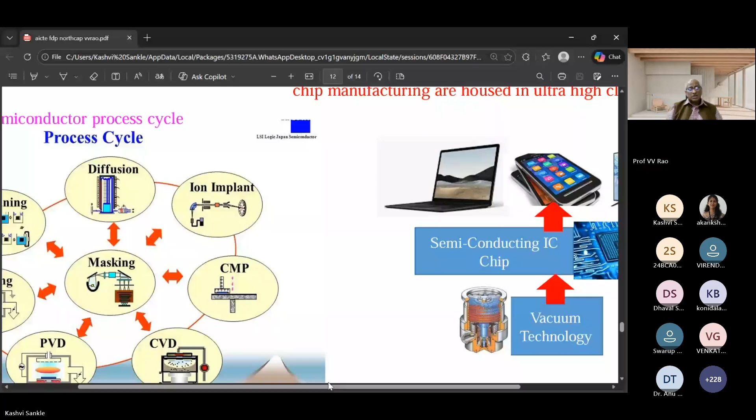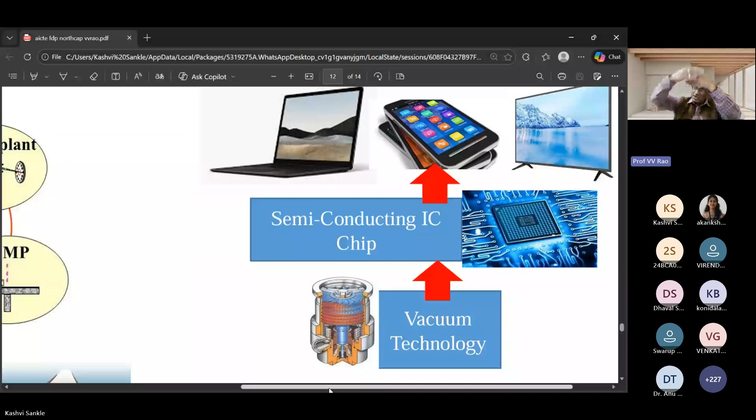Still bigger, still bigger. You see the TV, the display is also having semiconductor circuits, because it is nothing but LCDs, LEDs, plasma shield. Again semiconductors are controlling the intensities, red and blue, etc. Then cell phones and touch sensors, capacitors.

These are all again within chip related activities. And right side, plasma TV - there are millions, at any time only one spot is bright in your TV, I am telling you. But you see the total picture because it's traveling at 500 megahertz speed video signal. You cannot see - your eye cannot, if your eyelid can open and close in nanosecond, you will see only one dot bright on the TV screen.

So all this physics, material science, electronics, fab design, materials, mechanical engineering, understanding properly flow processes, clean gases, entire ecosystem has to be developed in semiconductor manufacturing. It is not just an understanding of electronics or chip design or anything. So for all these things, the base is vacuum technology. Then you will get chip with various things. This chip is used either in TV or mobile or cell phone. So come back to the original slide.

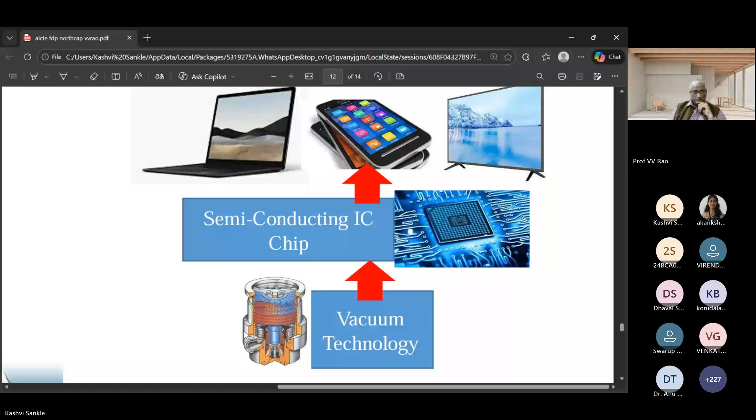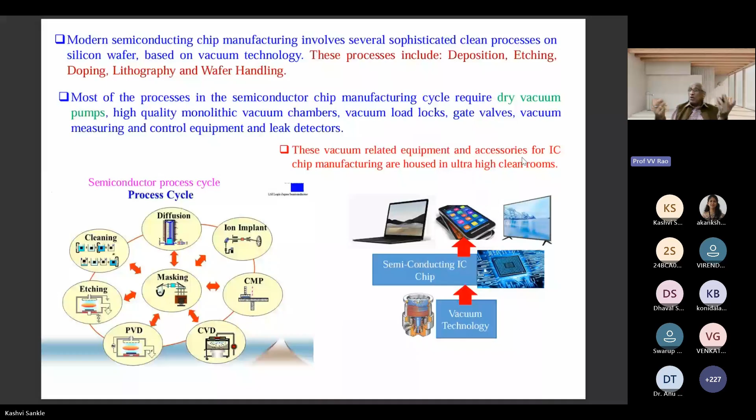So the modern - now I am reading that, you don't have to go through it. Modern semiconductor chip manufacturing involves several sophisticated clean processes on silicon wafer, and all these clean processes are basically vacuum technology related. Otherwise you have to produce gases of 99.99999 purity, which is much more costlier than vacuum technology.

And when you are putting all those things, you cannot heat - the convective heat transfer is too high. In atmosphere, if you put only pure gases, namesake purity, but heat is gone. Heat has to be conserved, like a thermos flask concept. Vacuum plays an important role there. Vacuum reduces the melting point and boiling points. And that's how you make the deposition.

Why is it deposited under vacuum? You are melting the silver and it goes up. In thermal evaporation, it is like an agarbatti that we are using - you are heating a very hot spot, and vapor comes out. That's called physical vapor deposition. It goes like this in agarbatti because of air molecules. Under vacuum, it will go straight. That's why it's called physical vapor deposition.

Similarly, sputtering - it is like people, when you go to the temple, you scratch that nanoparticles of that Shiva and all, you see, that vibhuti, and put it like this. That is called sputtering. So ion beams, which are like my nails, are accelerated under vacuum condition.

How is this ion produced? First electron has to be produced. How is this electron produced? Again in vacuum technology by heating a filament. These electrons have to be accelerated by high voltage. Finally ions are produced. These ions are scratching like machine tools and producing sputtered things.

And these ions should not escape to the body and discharge - you have to apply magnetic fields to make a magnetron sputtering. So electron beam also can be used to focus it. Entire material silicon will be at room temperature, one spot will be very hot - just like eye surgery, when you do laser, one spot will go to 1000 degrees, entire eye will be very cold. So same principles are used here.

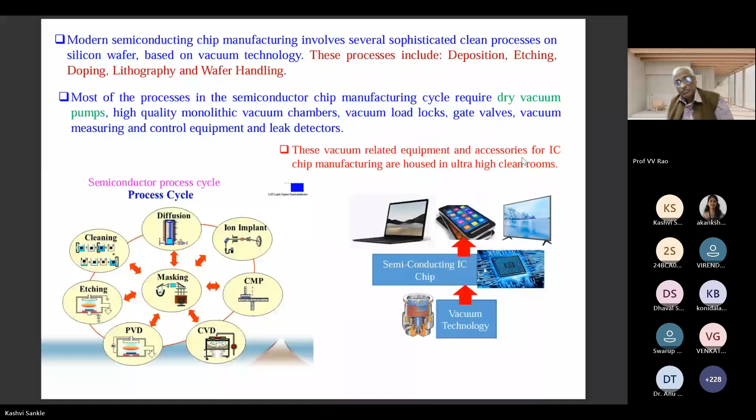And they are also giving for quantum and all, the same technologies, vacuum and other things are there for quantum chip or this chip. All are basically logic circuits only. So all these mission programs are there, whether you enter solar mission, nuclear mission, space mission, semiconductor mission or quantum mission, you have got enormous amount of fund.

And this is coming in a very big way. It is a big global hub for electronics, because if suddenly people decide to stop chip manufacturing or exporting chip manufacturing to India, we will be in very big trouble. One full year we will not have any cell phone. Can we imagine that? Can we imagine without TV, without cell phone, laptop for one full year?